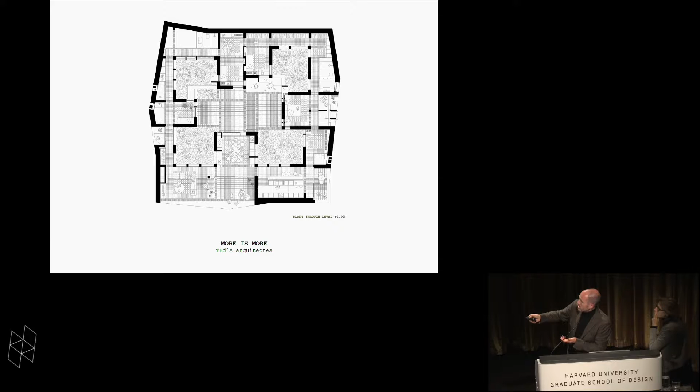But when you start to draw the plan in different levels, the plan changes. We can say that this is drawing the same house and the same level, but drawn at different heights.

Well, this is the drawing that we love to bring to universities, because it's those plans where you can perceive kind of different projects behind all these lines. There is a kind of a fight with the lines, and how many projects have died under these lines, just to keep the final one. Perhaps it's not the best one, perhaps it's just the one that is more in balance.

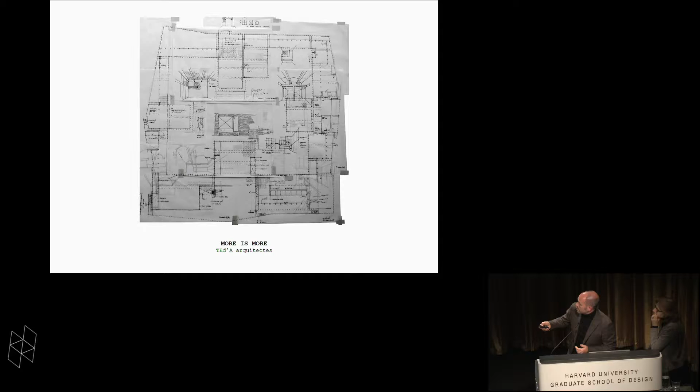Okay, we move forward. Then, with this simple scheme of bringing some rooms inside of the cloister, inside of the patio, you discover that the sections start to become quite interesting, quite complex in a sense.

On the right hand we have the street, like up here, and here we have the views. This is the west side of the house. Then you have the upper level, the bottom. The whole section is interior. When you cut in parallel about 2 meters, you have interior, exterior, interior, exterior, interior, but in 2 different levels.

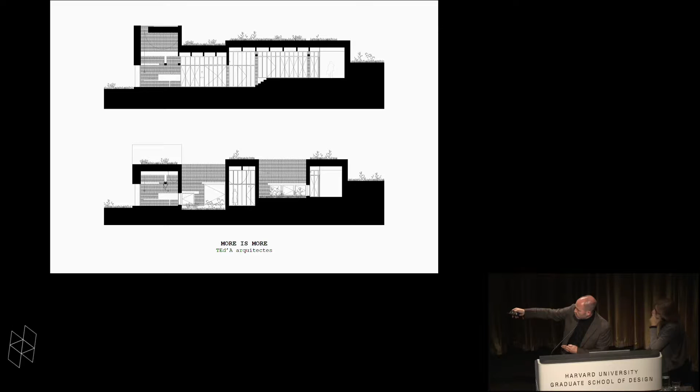If you move, you find interior. This is all exterior in different levels, and interior again. When you are in the middle, you start to have interior, exterior, but kind of covered exterior, let's see how, and not interior. Then you start to bring this simple complexity, we could say, into the project.

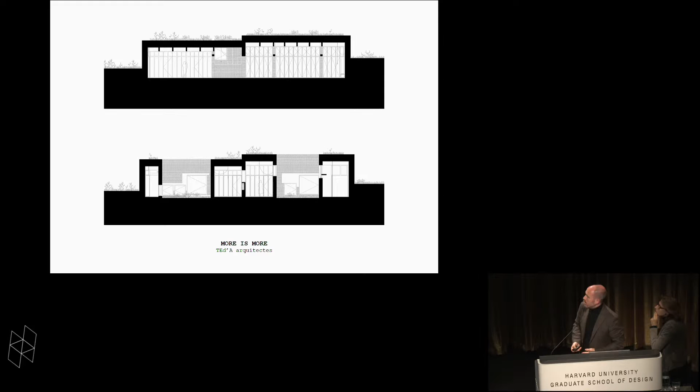And we look into the street, it's the same thing. It happens the same thing. You find kind of these different levels and different situations in the house.

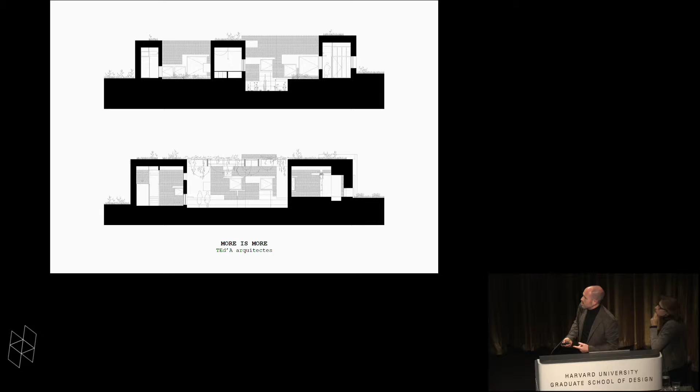If we pay attention, we start to discover that there are a lot of elements characterizing this interior. Then you discover lintels, you discover bricks, you discover chimneys, you discover building elements, constructive elements that are part of this interior.

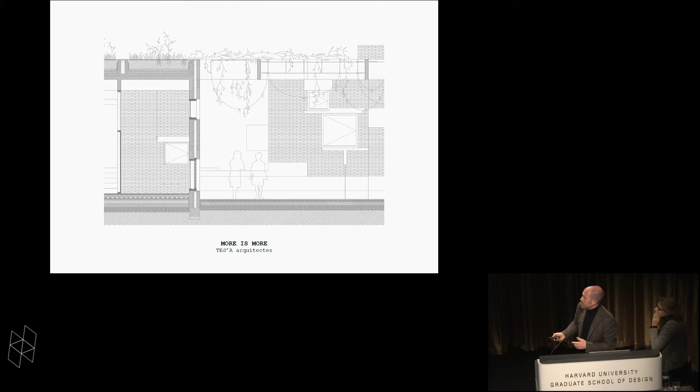Because what we would like is to have this interior of the patio with light and sun during winter, but not during summer. But with these holes, you don't solve it. And what we did is what we always do: look back, copy, and bring these things forward. At home, we have this vine tree in front of the house that has a very nice constructive detail. You have shadow only in summer, but not in winter, because the leaves fall.

Then it's a very simple element to copy and to bring to the project. With a very simple structure, you could have this shadow just in summer, but not in winter. Or if you don't want to plant, you could also do these canes or these fixed shadows that you can remove during winter.

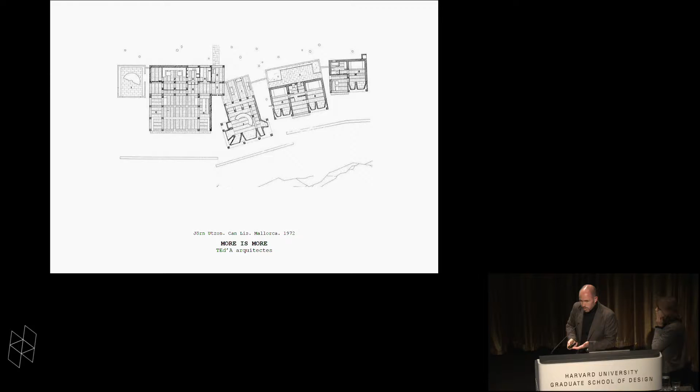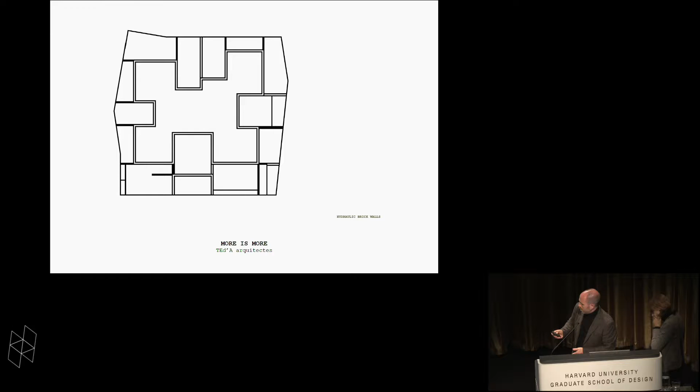Then when we think our projects, we start to study layer by layer and understand what every element wants to be. In this case, the outer layer of the facade was built with the stones we had under our feet the first time we visited the plot. And while doing the excavation, we were producing the waste material that will be part of the facade. If the outer layer is made of stones from the plot, the inner layer will be made of earth, of clay, of bricks from the island too. The dimension of each wall depends on the dimension of a brick.

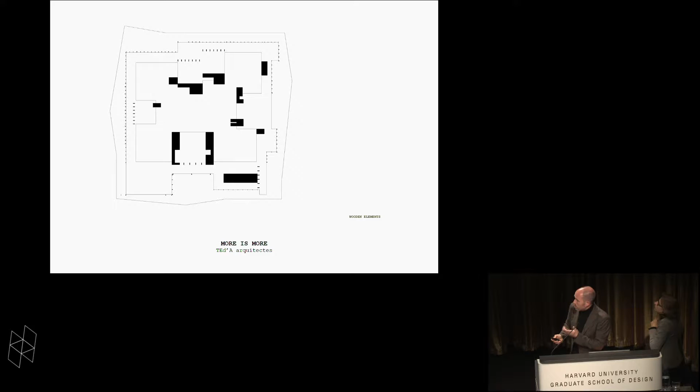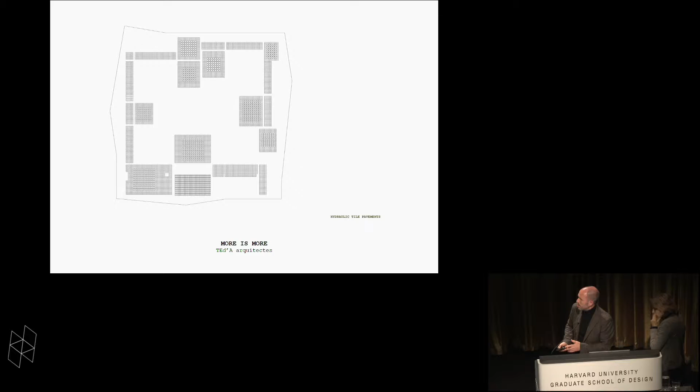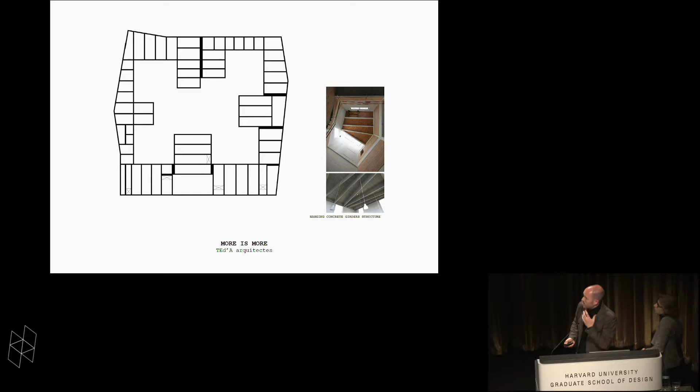Inside these walls, we are going to place furniture that is not movable; it's going to be fixed furniture all around, first in wood, but finally in concrete, as you're going to see. But we can also explain this project just talking about the pavements. In Mallorca, we have this very traditional hydraulic tile pavement that we decided to use in the project to express how every room has its own identity. We could also talk about the horizontal structure of the ceilings, or about the spacing between the beams of these ceilings.

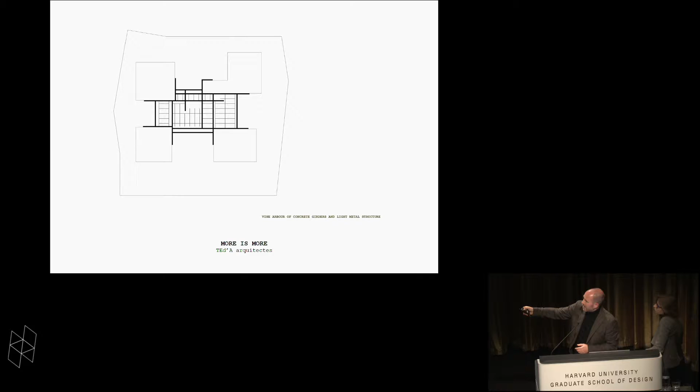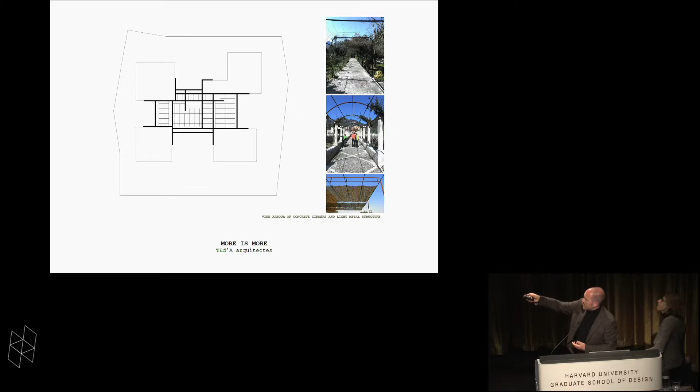And what happens in the center of this patio? We were imagining this central patio as an oasis, as a kind of ruin, as an infinite space that this vine tree, this vegetation, will finish with time. Then we imagined all the directions of the structure collapsing in the center of this patio. And we would like to build not a ceiling, but an unfinished ceiling, something that once covered with vegetation will be finished. But what happens when you start to think about every element? What happens with electricity, for example?

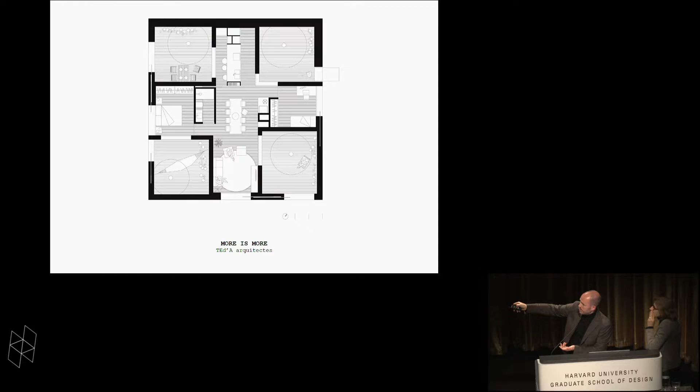Then these are four patios. Normally the patio is in the center of the house. In this case, it's not. Then each room has a double room, and you have a living room. You can stay in or you can stay out. You can sleep in or you can do the siesta under the tree in this hammock. You can cook in or cook out, etc. These double spaces.

Then when you are out and you start to get in, you don't know exactly where you are, because in this case you are in, but you are out. You don't have ceiling, you don't have pavement. These spaces in between. And when you are completely in, you discover that you have another interior, but perhaps it's an exterior, but it's part of it.

The popular knowledge tells us that it is not necessary to start from scratch. We can transform and we can reuse. Not recycling, just reusing. We can reuse and transform an old door that opened to the interior of the storage into a new door that allows us to solve new situations. I'm sorry.

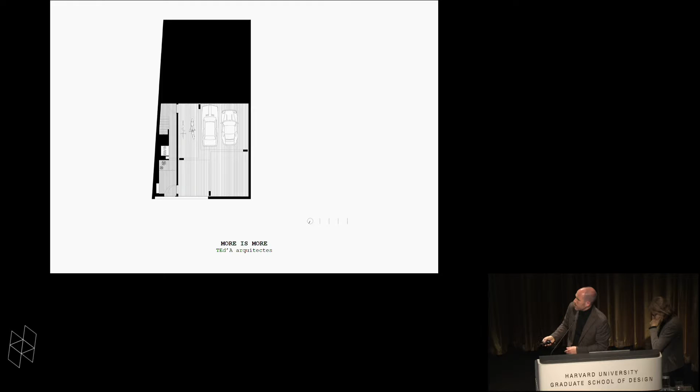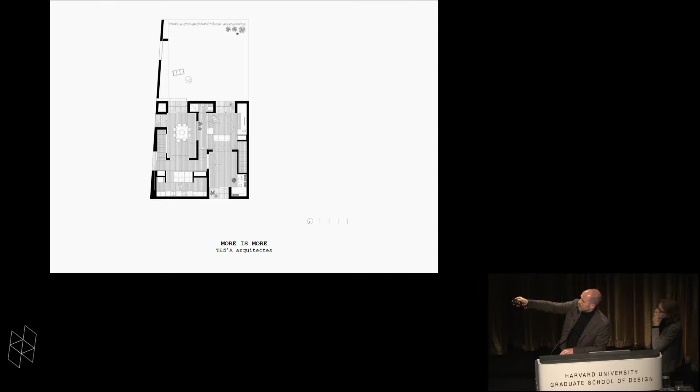This is the basement, but if we go to the ground floor, we have these four rooms, dining, kitchen, living, and studio, that are connected, with all the services in the perimeter: chimney, stairs, studio, storage, stairs, terraces, bathrooms, etc. And the middle is completely free. And there are some steps between these different levels.

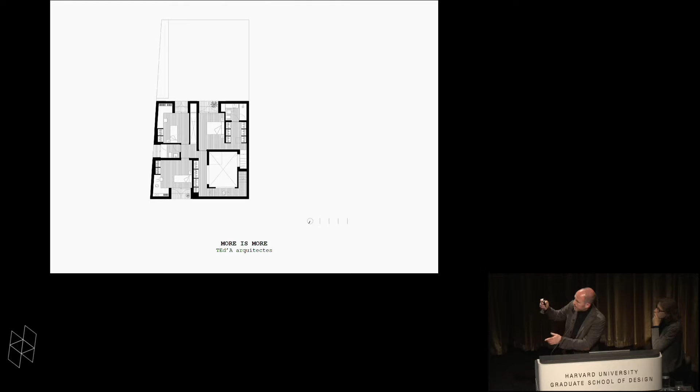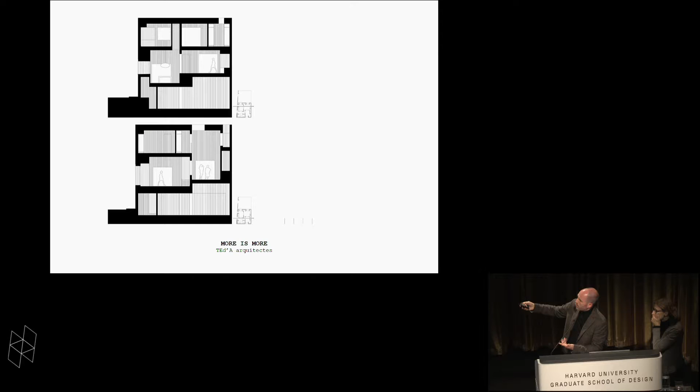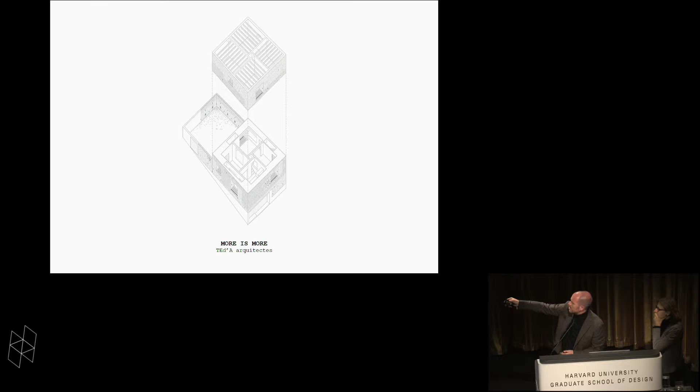The upper floor is for the sleeping rooms. There are three sleeping rooms with some holes connecting the different levels of the house vertically. From this very simple scheme, when you do the sections, you discover spaces that are connected and a richness of the space itself. There is pretty much nothing to see, but you can see these services in the perimeter and the swastika cross with these walls. But okay, we were talking about material.

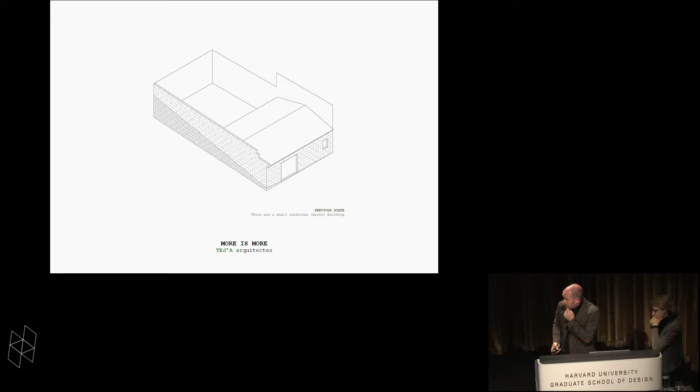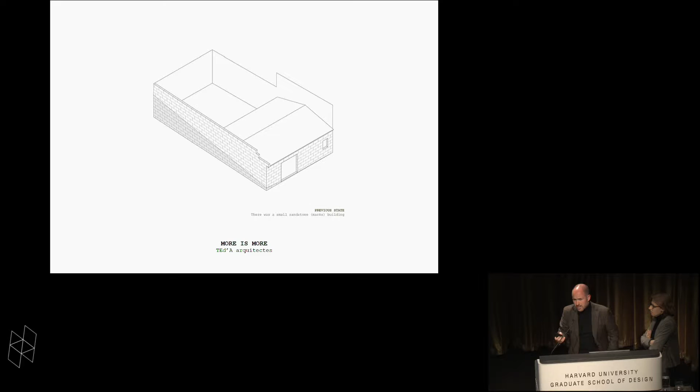We have been introducing these walls, and how are we going to build these walls? Well, in the plot there was a pre-existing building made of marés. Marés is the sandstone you have seen in the Jorn Utzon house, for example. It is the local sandstone that is commonly used all around. Is this one. It is a stone that is normally 20 centimeters deep by 80 long by 40 high. What you see here is 80 by 40. And as you can see, there are some small holes. We are going to talk about this later on.

Instead of demolishing this building and throwing away all the material, we decided, because of my father. One day we went there. Well, this is a house for my brother. And my father, with the thought of an old man, let's say, he's not old at all, said, okay, what are you going to do with all these stones? It was a question that was smashing us. It was really strong, because we went home like, okay, we cannot throw this. There is a lot of material, a lot of effort, tons of stone. What are we going to do with this? Then, of course, we decided we need to reuse it.

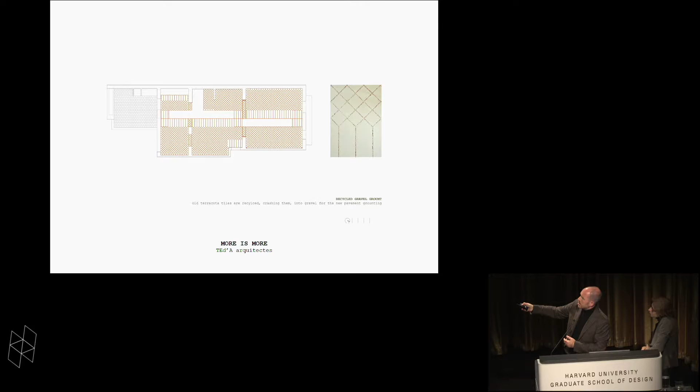However, we reused the pre-existing tiles, we smashed them, and we reused the smashed pre-existing tiles as an aggregate for the joint in between the new tiles. Then these red ants that you see walking in line, it's the old pavement that was there, no? And we could get a bit more in detail, but we have to move on.

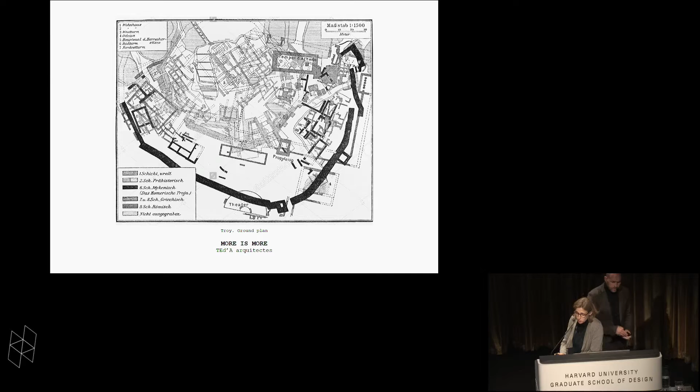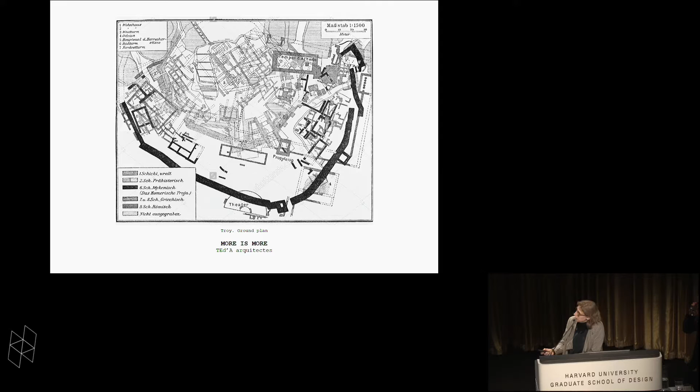The third concept, no? It's a palimpsest. We are never going to be the first working in a place, no? Here we have a map of Troy that shows us different times in the same space, no? These layers of interventions overlapping one with the others. Old lines sharing space with the new ones, no? The important thing is not demolishing, not erasing the past and not starting from scratch, but adapting to it, taking advantage of it.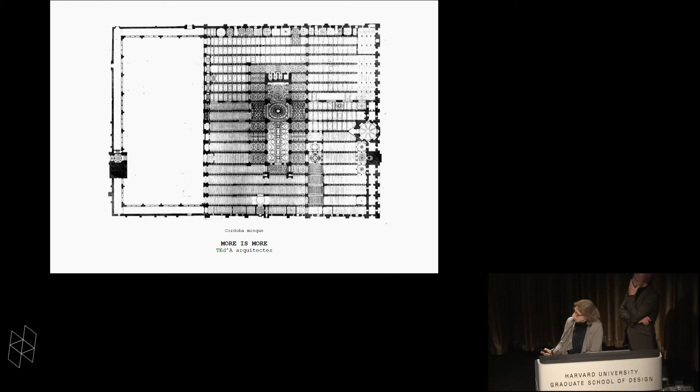The old palace walls were reused for the new houses, and some rooms were transformed into squares. No, sorry. Right. Lots of buildings have been built as a palimpsest, overlapping and reusing, revaluing it. This is the Cordoba Mosque, where we appreciate the old church. But not only buildings, but also cities. An old Roman circus became a square, and its radial walls became party walls in between the different houses. And the important thing is not erasing, not forgetting and not hiding, but taking advantage of the past, reusing it and revaluing it.

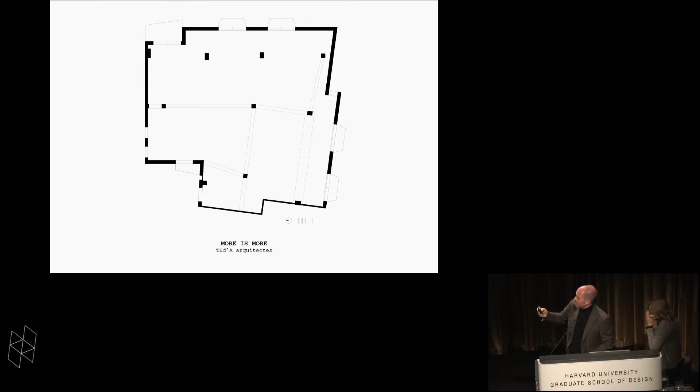In this case it is again an apartment in the old city center of Palma, the main city of Mallorca. When we got in, this was what existed at that time. The apartment is located in a corner. This is a street and a street. Then here is a neighbor, entrance or stairs, and a neighbor, and a street and a street. And what we only had there in this plan is a perimeter, facade or party wall, and some spots of a structure.

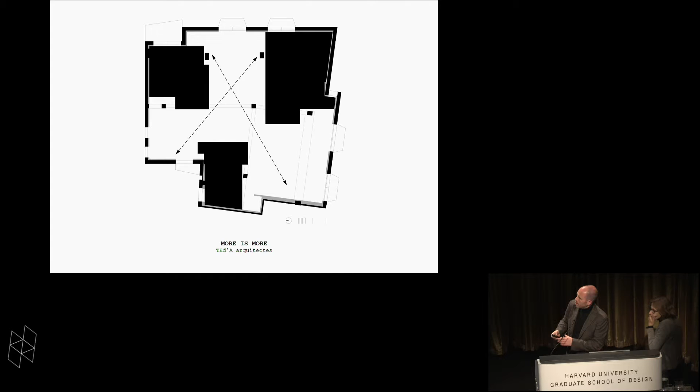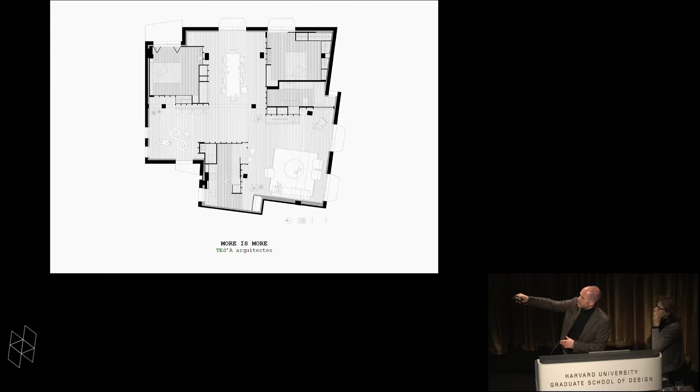We decided to place 3 closed rooms: 2 sleeping rooms with a bathroom and a kitchen, in order to have these diagonal free spaces in between the closed spaces. Then these are the 2 rooms with 1 bathroom and the kitchen. And here we have the entrance as a playground, the dining room and the living room. This is more or less the result with the model. And this was one of the first drawings, or perhaps the first one we showed to the client.

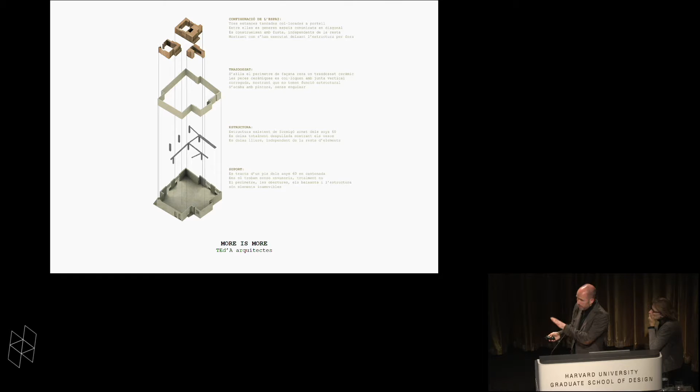In this case, we didn't know it at that time, but it's the beginning of building a palimpsest. There was a support with an existing perimeter. There was an independent layer made of concrete. This is made of marés. It was just a 1-layer facade. We decided to insulate all the perimeter and to build an inner layer with, in this case, bricks. We didn't know what kind of bricks. And then the closed rooms will be made of wood. So different materials, different shapes, overlapping in the same place. But this was just the very first drawing. This became much more complex, rich, and fun when we started to build.

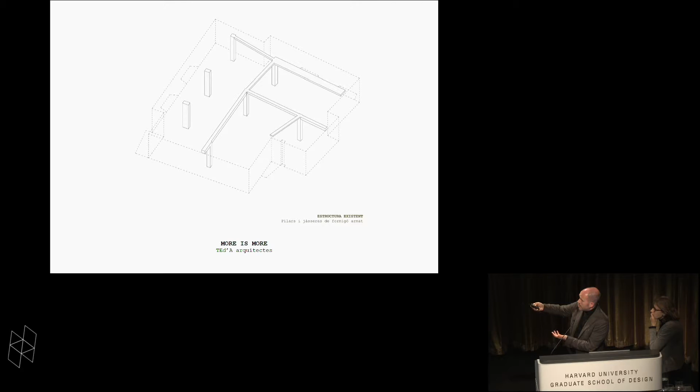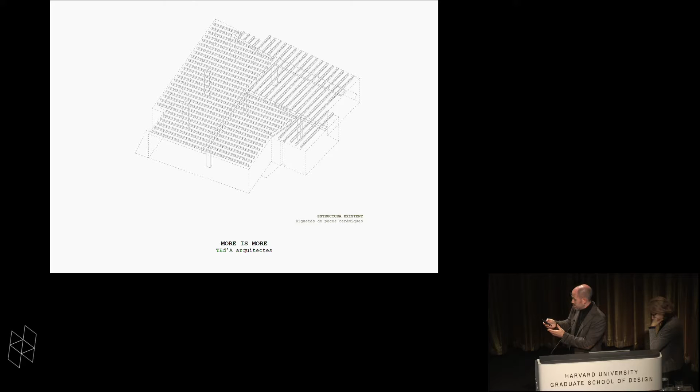Then there was another independent layer overlapping, this concrete structure. And in between this concrete structure, there was a kind of very special clay structure. These are beams made of pieces of clay, U-shaped, with iron inside, and some concrete with steel in it. We thought it was a special thing that we needed to keep, to see, to revalue.

Then, in between, I don't know if you saw it, but when we entered the apartment there was already a pavement made of concrete, poured by the old owner, over the pre-existing tiles. Once she demolished all the partitions and walls, a gap between the different rooms appeared. There was a hurt part of these past moments, another layer that we decided to keep.

The easiest thing to solve this gap, the first thing you think, is okay, we have concrete all around, so we'll infill it with concrete. But as you know, when concrete dries it becomes smaller, and a crack will appear for sure. And the concrete will not be the same color. Then you will perceive it, you will see it, I'm sure.

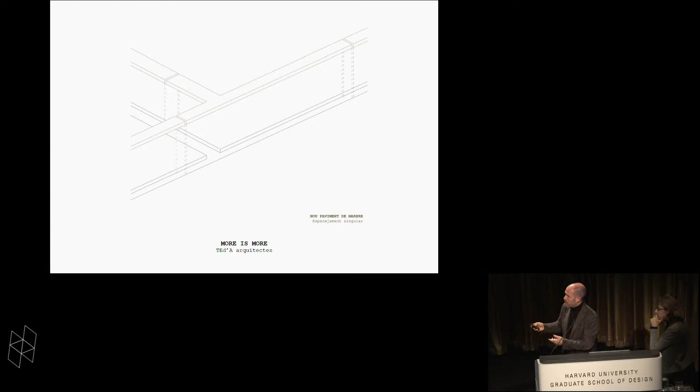Instead of infilling with concrete, we decided to put these old partition walls at a higher level, and instead of concrete, we used pieces of marble to infill this. The marble will not become smaller, so the gap will not appear. Perhaps the constructive problem is solved. This was the aspect of the gap once we cleaned it.

Sometimes the two rooms weren't at the same level, so we had to put it at the same level. We used the gap to run some cables and electricity cables. And then a nice work came, a very kind craftsman making all this puzzle.

All these different pieces, we decided to understand this joint, this gap, as a continuous element. When the gap changes direction, no cut will appear. The cuts are in between when it's kind of straight, in order to have this continuity. Some nice pieces appeared, like this T-shaped one, very fragile, but it worked with the first one, and lucky us.

Then, once it was finished, we decided to polish everything at the same level. That's the layer of these pre-existing walls. Sometimes we're covering an old closet.

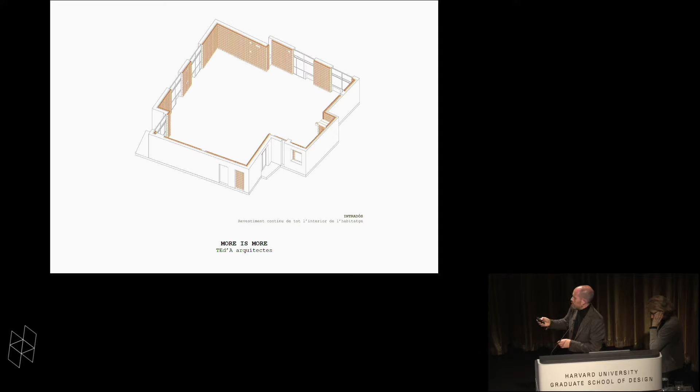Then the next layer was this perimeter wall that was hiding the isolation. The isolation was done with natural cork that the client had from an old work he did, and he had some pieces, and we decided to reuse it also.

To understand what kind of material we could use for this interior layer, we went to a brick factory, just to understand what they were producing. It was kind of a stupid question, an architect asking what they produce, but I was looking for something cheap because it's a very low budget work. And he said, no, we produce bricks, we produce tiles.

Let me have a walk all around your... yeah, sure, you can get in. And while we were walking through, in a corner we discovered a huge amount of bricks full of powder and old stuff. I decided to ask, what is this? He said, okay, I will never sell this. But what is this? Okay, in Spain we have a system called termoarcilla.

I don't know if you have something like this, there are pieces of 29 centimeters, or 19, or 24, or 29, large, but you cannot cut them, they have air cells in them. The system works only if you don't cut them. However, in Mallorca everyone cuts everything, and it doesn't matter how it works. But so as not to cut it, they produce termoarcilla pieces of adjustment, 10 and 5 centimeters, sold in a package of two of 10, with the central one being 5 centimeters. This brick factory needs to produce the proportion of adjustment pieces just to have the stamp, the certificate of termoarcilla.

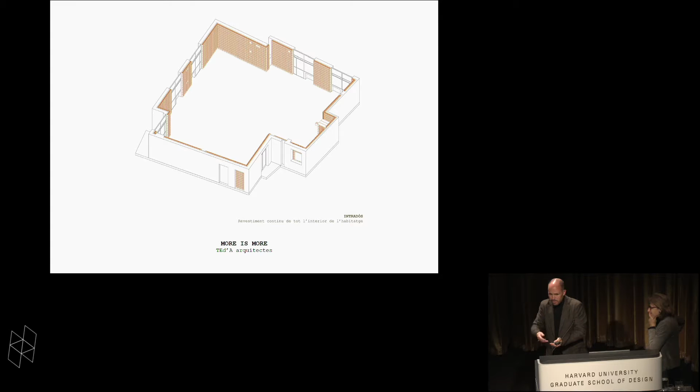They didn't sell it, so I said, okay, if you don't need it, I will take it. Then the prices started to go up until a certain moment where I said, okay, we will not do it with this, so half price is for you. Then we took all this waste material again, something that's not needed for anyone.

Then these are the pieces, 10, 5, and 10. Normally it's used in this sense, not to break these cells, these air cells. But as I explained, in this case we had used these cork panels as thermal isolation. Then we don't need this material as an isolation material.

As you are going to see later on, we reuse it. We use it on this. This is the facade that we are going to see in the interior of the apartment. Then we turn it.

These pieces, as I said before, are 19 per 19, well in fact 19.5 per 19.5. And this is our famous tile that I explained before, that is 20 per 20, because, as you can imagine, over this tooth, how can I place a socket? It's impossible, impossible to screw it.

Then we are going to substitute one of these pieces for our famous tile in order to have the plugs on it. However, the height of the interior of this apartment was 2 meters 70, 270 centimeters, and this is 19 plus 1 of the joint, which is 20. Then we need 10 centimeters more.

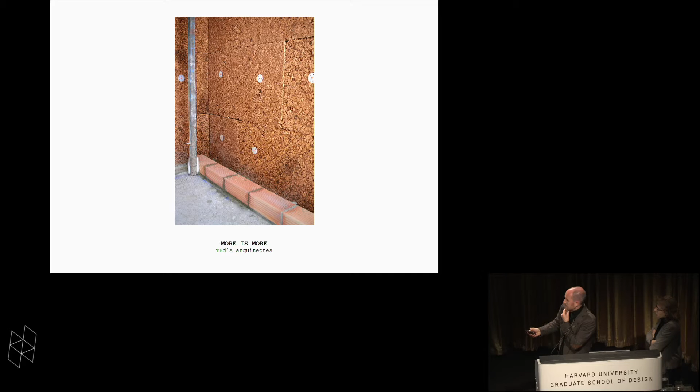And how do we place these bricks on the walls? Normally you place the bricks cutting the vertical joint, but in this case it wasn't a structural wall. So we decided to place vertical joints just to show that this is not a structure. And we turned the termoarcilla, this thermal brick, to show that it's not working as thermal stuff.

Some other tiles help us solve different points in order not to cut the termoarcillas. And at the end of some walls we also used these tiles. However, when the electricity comes, we take out some bricks and substitute our tile with 3 precise holes: 2 for the screws and 1 for the cable, of course. And this is it.

And this is with the plug. Then we add another layer of these palimpsests, these wooden boxes. Why were they made of wood? Because it wasn't a pre-existing structure. In order not to put more charge on the ceiling, we decided to build it in a very light material.

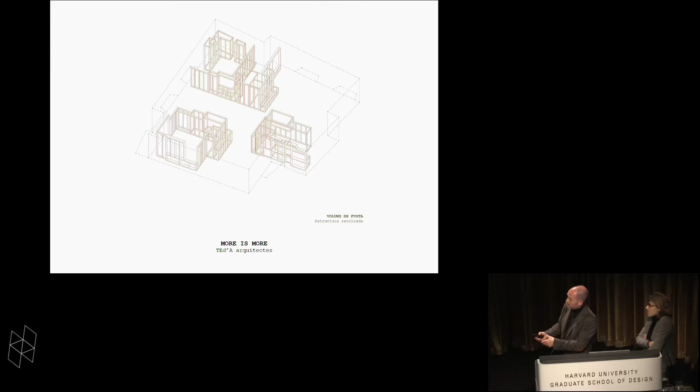I'm not going to get into the joints of this wood because we don't have enough time. But we were working in the carpenter's atelier, like one-to-one, small mock-ups at the very beginning, placing each element in its place with the carpenter, and also with the client, Vicente, the owner, a very special guy who was always on site.

And what happens when you have to hold the lights in this space where we want to see the ceiling? We cannot have the cables in the ceiling; they are going to be over the ceiling.

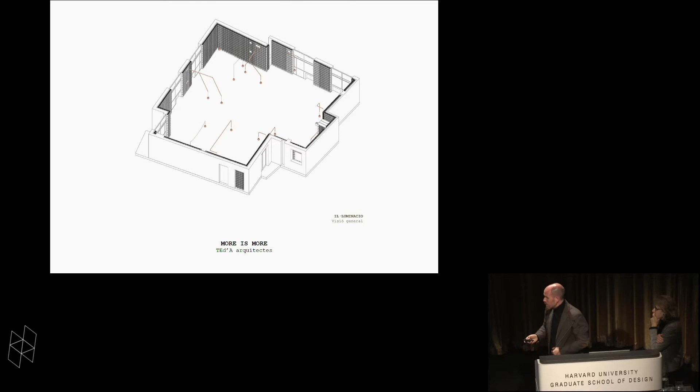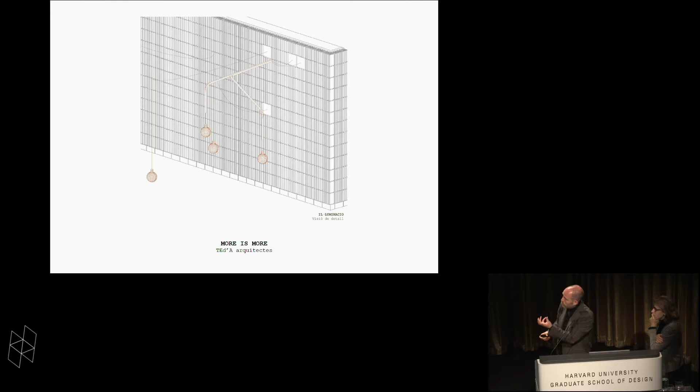What we decided is to have a tube that will be hanging from the ceiling. Then from the plug, we are going to have a cable running inside of this tube, and the bulb will drop, the light will drop from this tube.

And in contrast with the ceiling, which has a kind of rough texture, we placed these brass tubes, in order to contrast with it.

Then this is the plug. It goes until here, then it runs into the tube, and then it drops the bulb.

This is how they hung. We will have the cable running in it.

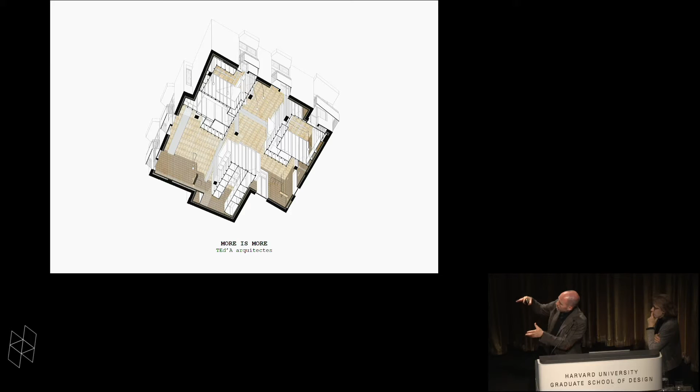And that's the complete result of elements coinciding in this same space, layers of interventions, layers of elements.

This is how it was before adding the woods, which were placed one by one in its place.

And this is more or less how it is now, not finished yet after 8 years, but we are going to finish someday. It seems here that it's finished because we decided to take some photos and clean it, but now it's a mess again. No worries, we will do it.

It's not finished because the owner doesn't know exactly how he wants to finish it. I think we are going to let this first room stay open, just with the structure. It's a kind of a room, but it's open. It doesn't need to be closed if you don't want to do certain things in it.

Here you can see the diagonals in between these different rooms, and all the elements hanging around. And there's more coming, but we don't have time enough.

In any case, there are some funny things. Of course, we need to have fun during the site. But all this stuff—if we have time, we would like to get into another concept, the craftsmanship. Or we could say the precision of things done by hand, or the imprecision sometimes, things that are not very well finished.

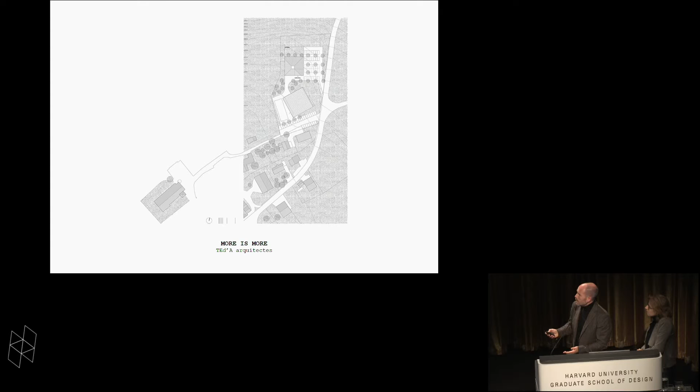Then, in the competition, this is the model from the competition, the 1 to 500. We did a very compact volume, regular shape, pitched roof, etc. And I would like to bring these plans that are from the competition, because we drew the structure to submit the competition, even in two A1 panels. We decided to say that the structure was important.

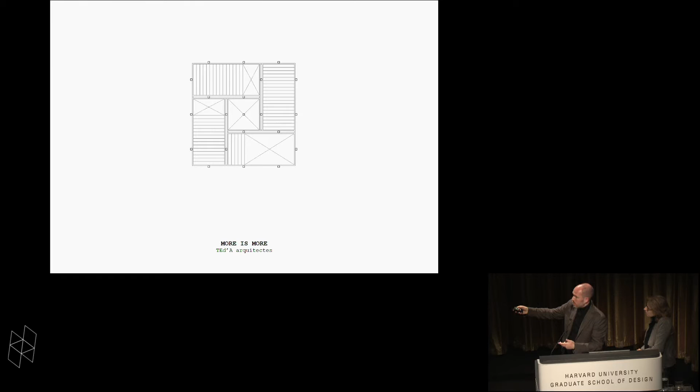All these points, all these columns made of wood, and these double beams on the sides of the columns. This is for the same reason as always: the beams are beams, the columns are columns, and the columns don't want to be beams.

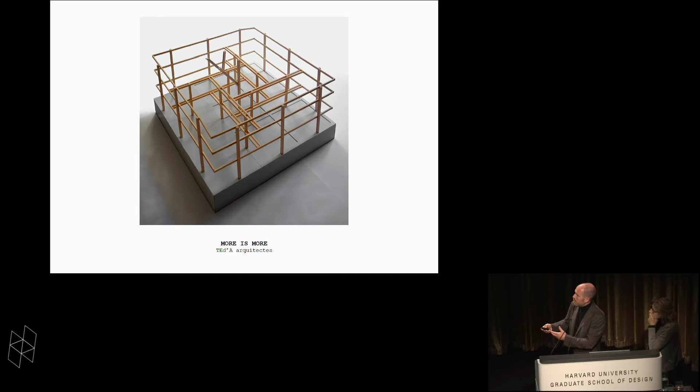Then this was a model that we did just for the structure. This was going to be the basement made of concrete. On it there will be a main structure made of columns and beams, double beams and simple columns made of wood, and then a secondary structure will appear to cover everything.

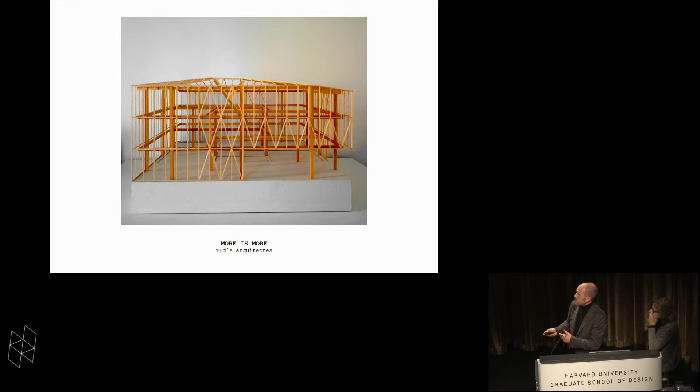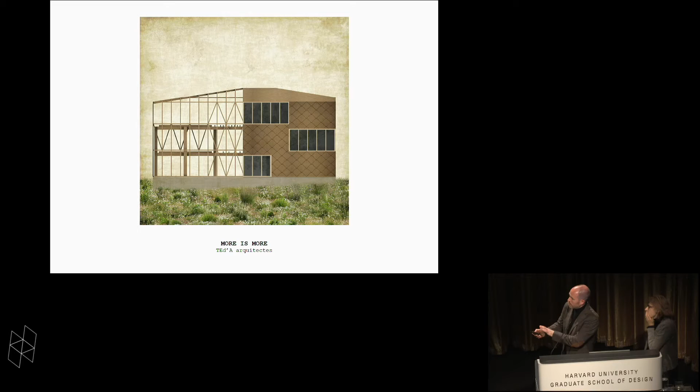And then the facade in the competition. We would like to bring this because there are some mistakes in the competition that you submit and then you solve, of course. The facade was a kind of a dress covering all the structure, but we didn't want this to cover everything. Then we decided to do this trick, this double render, showing the structure, but showing also the dress. Because if we just show the dress, we don't show the structure. At the end, we wanted to show everything, and it was fine. I think we got it.

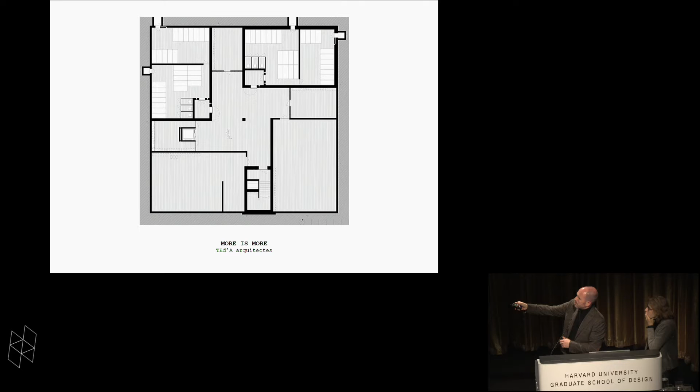And the interior had this aspect of a very old farm, with this triple space with this column in the middle that I'm going to explain afterward. And these are the final plans. This is the basement: technical rooms, storage, etc. And in the center there is a column. Then on the ground floor there is kind of a porch, then different rooms and features. But in the center there is a column.

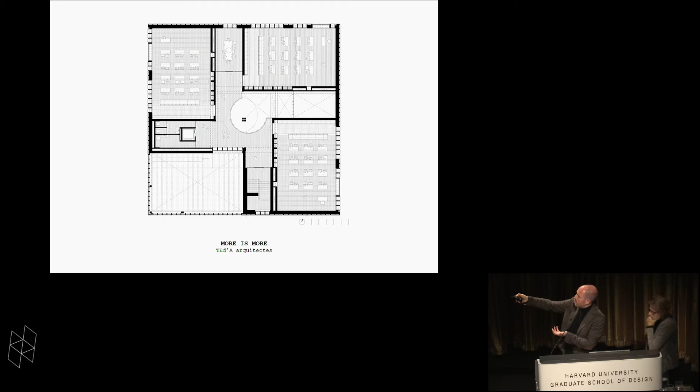When we go up, in this plastic order, we have the services in these small rooms and the classrooms on the corners of the building. Then this is a double space here, and when we change level, it turns. But as you have seen, that column that was in the basement is going up, up, up. And when it gets under the skylight here, it opens just to hold the roof. There is no other need for this column.

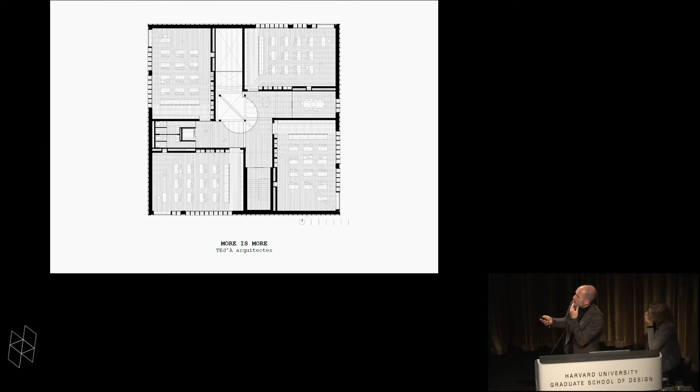Well, this is the structure of the organization of the building, and this is the plastic shape. When you start to build, it's there, of course. But with this very simple strategy of just turning the double spaces 90 degrees on each plan, once again, with this very simple scheme, you get very surprising spaces inside the building.

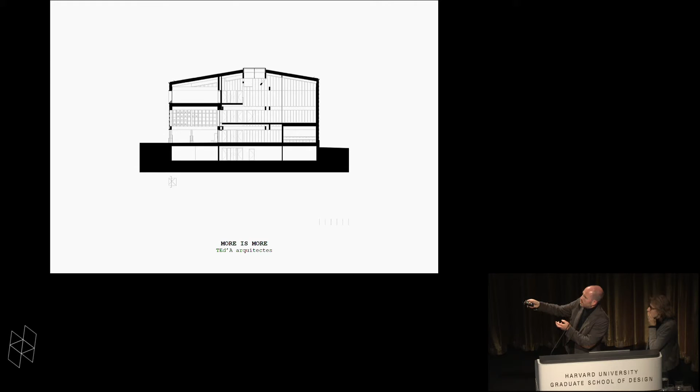And here you have a double space connected with a double space. If you move a bit, it's a triple space. If you move again, you have the double space in the porch. Again in the porch, then they are connected. So from this very simple scheme, you start to have this complexity.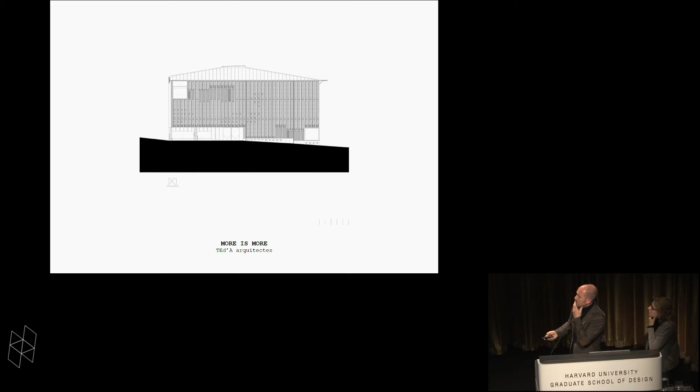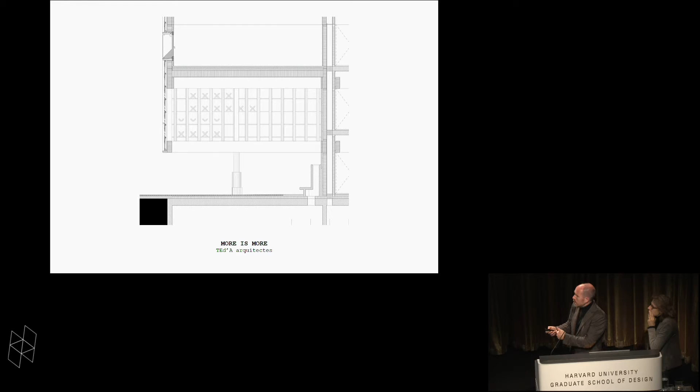Then we decided to build room by room with very strong detail, paying attention to every corner, to every millimeter, in order to build these models at 1 to 15. We always work at this scale. You can perceive different small joints here, a 1 centimeter joint. In these models you can do it, and you can perceive perfectly the proportion of things.

These shingles in the bottom, of course, were because of the snow, because of the rain. The first shingle couldn't be made of wood because it would rot because of the snow and the rain. Then we decided to change. Here it was brass, but of course brass in Switzerland can't be paid either. Then we decided to move to the traditional copper ones.

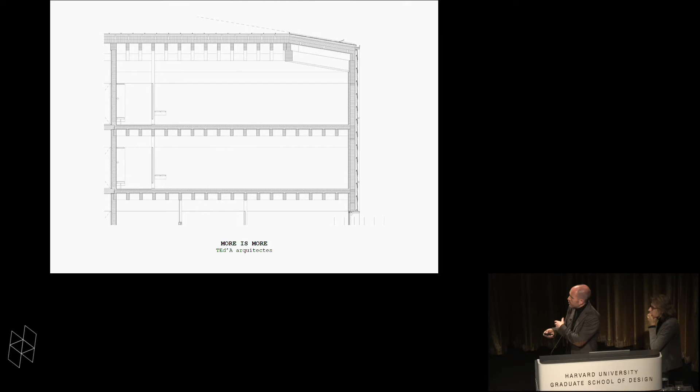But we also made different models of different classrooms and main spaces with very precise detail. This is one of the last, the upper level. And there are some points where you can say, okay, this is not too precise. For example, there's a small gap here that ends there. But of course, it is for the air conditioning. And you have one material in the changing room, one material in the classroom and one material in between, the wooden one.

Then you can get into the detail with some precision. You have all the joints in between the boards. I think the projection is not precise enough, but it's okay. I think these models are very useful for the client, etc.